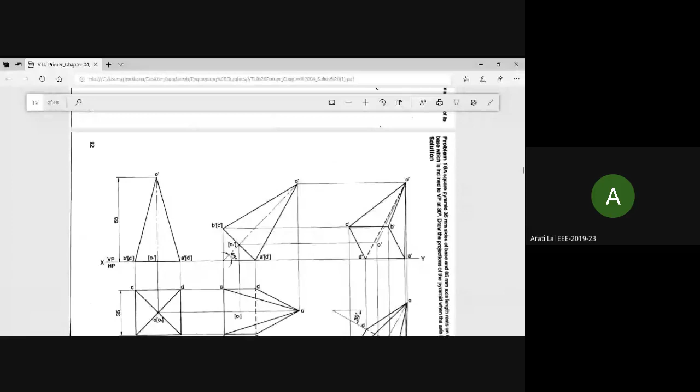Now I will be switching over to the pyramids. The only thing I expect from you people is, please do the problems on hexagonal prisms. Similar type. So I covered almost four different types: two in square prisms, two in pentagonal prisms. Take one of the problems on hexagon also, an angle problem or any of the solid prisms problems.

So now I will be moving on to the next type of solid, what we call a pyramid. Before I start, basically the pyramid is a solid which has a base, and its lateral faces are bounded in the form of triangular surfaces. These triangular surfaces meet at a common point, what we call an apex. I think we discussed this in the first class on projection of solids, where we gave an introduction to the different types of solids and their terminologies. So before I start, I wanted to refresh those things.

The axis in the case of a pyramid is the one which joins the apex to the midpoint of the base. So that is the axis. Once you say a pyramid, that solid should come to your mind. How you can imagine the solid: the base might be square based, pentagonal based, or hexagonal based. Only these three types are in the syllabus: pentagon, hexagon, and square. From each side we have triangular faces, and the triangular faces meet at a common point, what we call an apex.

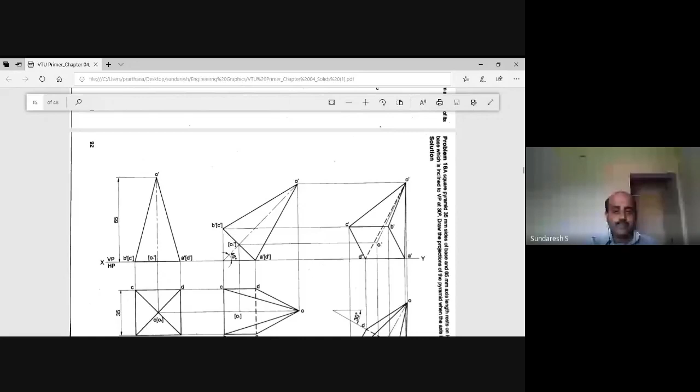So let us start with a simple problem on a pyramid. Then we will switch on to the problems in the other solids in a later class. Today I want to start with one problem on pyramids. Can you see this, everybody? Yeah.

So take down the problem. A simple problem to start with the pyramid; pyramids are relatively easier. Take down the problem statement. A square pyramid of 35 millimeter sides of base and 65 millimeter axis length.

Rests on HP on one of its edges of the base, which is inclined to VP at 30 degrees. Draw the projections of the pyramid when the axis is inclined to HP at 45 degrees.

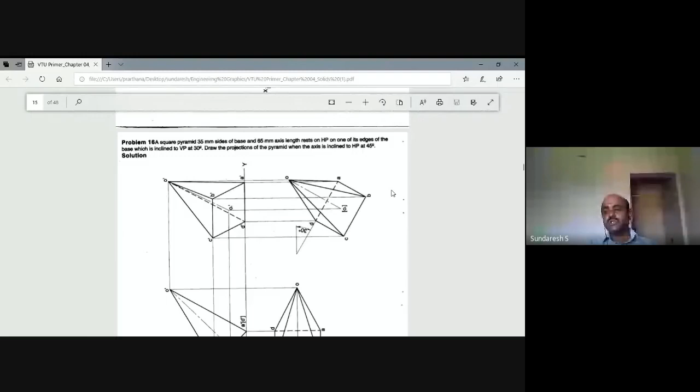and move to the third position where we have to show the base edge, which is resting on HP, is inclined to VP at 30 degrees. In that particular position, draw the top and front. So this is how you should think before you start projecting on a sheet of paper, how to approach this problem. Okay. So let us start now.

So when you keep a solid, that is a pyramid, on HP, either it is resting on a corner or resting on an edge. So generally we always start with the top view here. This is what you must follow in the case of a solid. Solids always start the projection with the top view. In the top view, you can see the true shape and true size of the base, whether it is a pentagon, a hexagon, or a square.

So therefore, always start with the top view in the case of solids, because in the problems we are going to discuss, and in your syllabus, the solid is resting on HP only. So in this case, when the pyramid is resting on HP and you observe from the top, you should be able to imagine what image you will see of that pyramid from the top view.

So simple. Okay, basically a pyramid is a solid which has one base and is bounded by triangular faces. In the case of prisms, we had rectangular faces, whereas pyramids are made with triangular faces. This is the change you have to bring out when you switch over from prisms to pyramids.

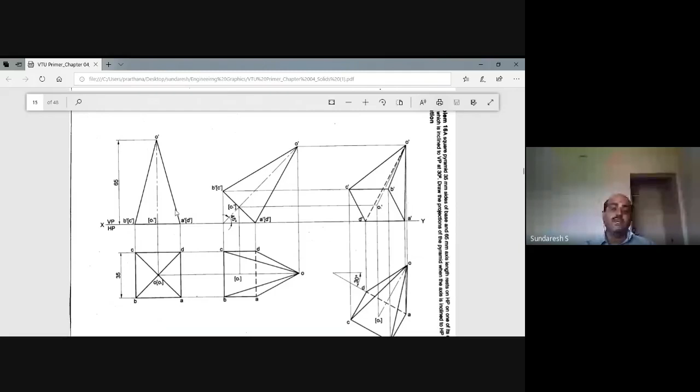See, when the pyramid is there, please remember this, the front view will be a triangular face only. So please, if by mistake you make it as a rectangular face, you are going to lose the entire 45 marks. That's what I am telling you. There are so many instances, very good students, they have about 40 out of 40 in the internal assessment marks, but they might have made the mistake of drawing a pyramid instead of a prism, or a prism instead of a pyramid. And they have lost 45 marks.

That should not happen. So please be careful when you are attempting a solid problem, read the question once, twice, thrice, until you get clarity with the problem, which is the solid they have given, how will be the initial position top view and front view, then go ahead, please. Okay. So this is the initial position of top view and front view of a square-based pyramid resting on HP with one of its edges of the base.

So now what it says in the second position, I hope you are following. If you have any clarification, please stop me. At any position, you can clarify your doubts. Let it be very silly doubts, not an issue, because you should not carry the doubts. They need to be clarified.

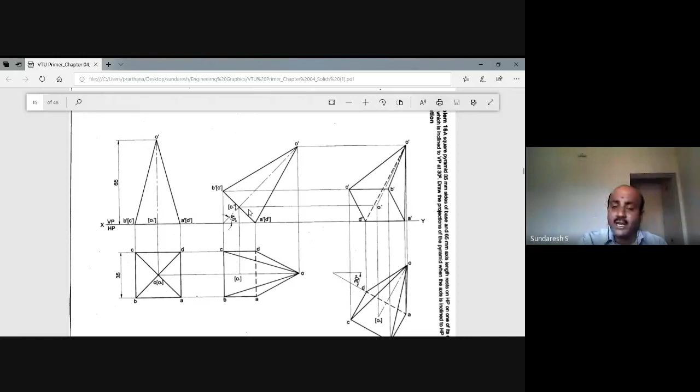So therefore, you have to start the second position front view by drawing a line at 50 degrees. When your line A dash D dash is inclined at 50 degrees, by default the axis is inclined to HP at 40 degrees. So when starting the second position front view, the angle of inclination should be equal to 90 minus the angle of inclination of the axis they have given. So first you have to draw this.

Therefore, in this case, 90 minus the angle of inclination of the axis with respect to HP, 45, is 45. So this is also inclined to HP at 45. So first you draw this A dash and B dash. Once you get this line A dash and B dash, it is easy to construct this triangular face.

So take a compass, measure A dash O dash. With A dash as center, draw an arc here, measure O dash B dash, this edge, with B dash as center, cut that and join those 2 points. Transferring a triangle is not difficult; using the compass you can get it done. This is how you transfer the initial position front view to the second position, satisfying the condition that the edge is resting on HP and the axis is inclined to HP at 45. So now the second position front view is drawn.

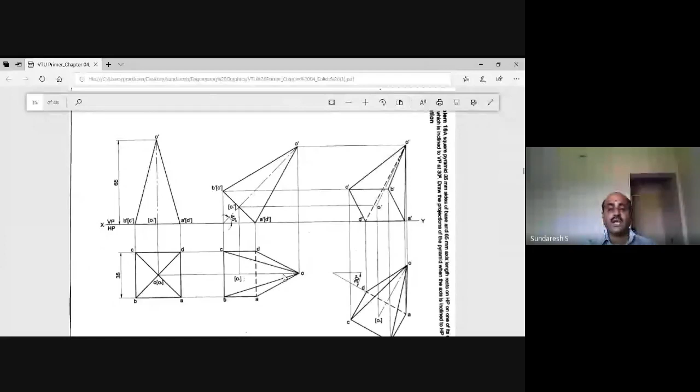So, now we have drawn the projection of a pyramid with the condition that the axis is inclined to HP at 45 degrees. Hope you people are following. Please do it. The pyramids are relatively the simplest of all the solids that we discuss.

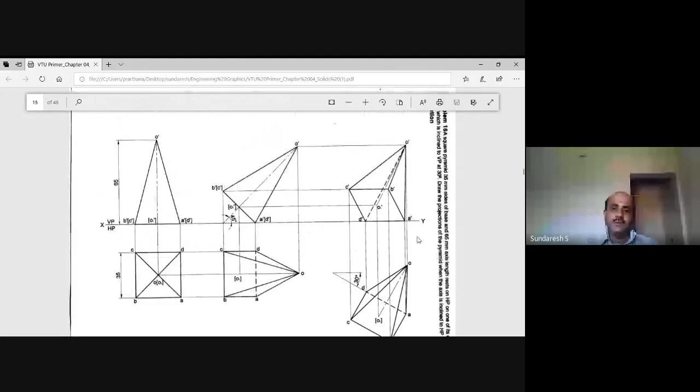So now, moving to the third position here. The condition we need to satisfy in the third position is that the base edge resting on HP is inclined to VP at 30 degrees. The base edge resting is AD. This base edge should be tilted such that it makes an angle of 30 degrees with respect to VP. In the sense, the entire solid is tilted such that the edge AD makes an angle of 30 degrees with respect to VP. Okay. So that can be shown in the third position.

So now the second position top view should be tilted such that AD makes an angle of 30 degrees with respect to VP. So take a convenient distance below the XY line. Draw a line parallel to the XY line, and from there measure 30 degrees and draw a very thin line. Okay. So on that 30 degree line, the base edge AD should appear.

So for that, you are tilting in this direction. First you can mark a point D on the 30 degree line, then measure the length of AD. Okay, by using a compass or a scale, of course. It is the same as 35 millimeter, not an issue, but always please practice taking the distances with the compass. It is always easy for you. So cultivate that practice. So take a compass, measure the length of AD.

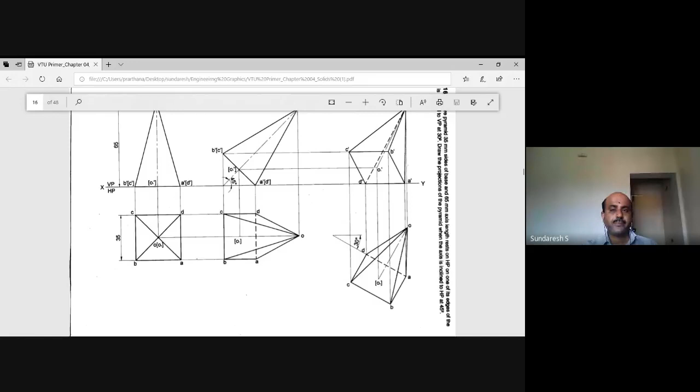Okay, O should be drawn. So how do you measure this? So take a convenient distance from this. Measure this. Okay. So what is this distance from O1 and O? Yeah. So now you can connect the points, join the points and measure O. Now we have to mark the point O with reference to the O1 and you have to join these.

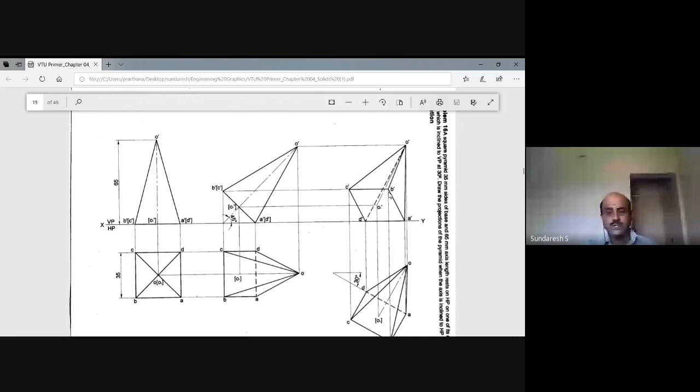So once you transfer this complete pyramid over here, then project it back to get the front view. So project the top view to get the front view over here. So draw the projector lines from each one. So again, similarly, you draw the horizontal projectors from the second position front view, and then you mark the points first. So once you mark the points, then you are going to get the front view. So the intersection points you can mark, and now you apply the rules of visibility.

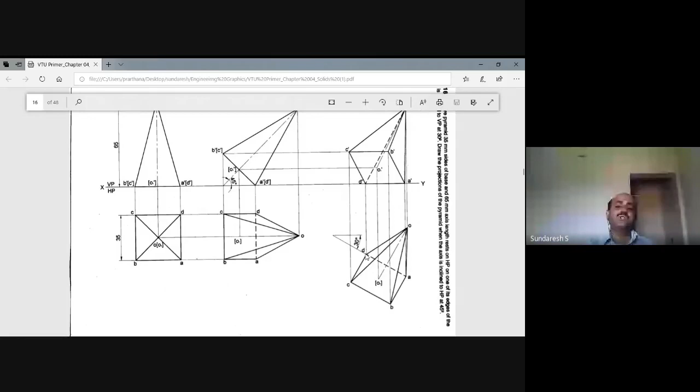When you are just observing this solid from the front, the observer is here, okay? So the base is completely visible for you. So the base of a pyramid is nearer to the observer, and hence base is completely visible. So once the base is visible, then the point which is away from you is the point D, the furthest point from the observer in this front view. So the edge which comes out of D should be considered as an invisible edge and should be shown as an invisible edge in the front view if it is not an outline of a solid.

Okay. Now, once you draw this point D, base is completely visible in the front. So you can make this base a continuous line over here, right? And then we can see this complete triangular face OBC. OBC is visible, and of course OAB is also visible in the front view. So the only triangular face which is not visible is the one which comes out of D. So this is D dash. O dash D dash is the edge which is invisible in the front view. So you can mark it as an invisible edge and join all this, they will form an outline, and then join O dash and O1 dash, which is the axis line.

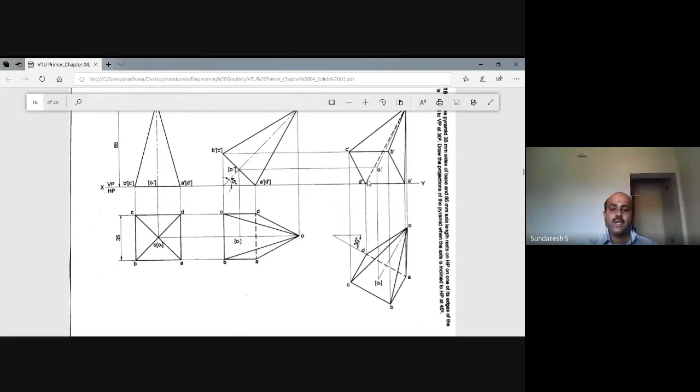Okay. So this is how you will complete the projection of pyramids. So if you have any doubts here, ultimately you are satisfying the base edge A dash and D dash on the HP. So AD is resting on HP. So this is how you are going to validate that A dash and D dash should be on the XY line. Okay, so this is how you should represent it. So please follow this.

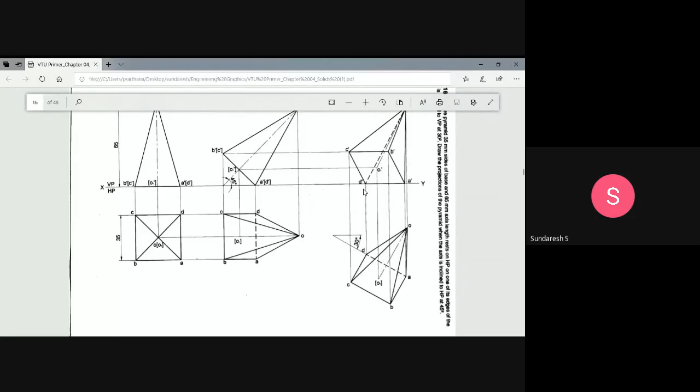My dear students, please keep on doing your sketchbooks or your sheets of paper, whatever you have available with you. Please complete all these drawings in your sketchbooks. Why? Because you will have a very short period before your exams start. Once you come to the college, maybe within 3 or 4 weeks, you will be having examinations. So a lot of things will be happening in those 2, 3, 4 weeks. So better always complete and get ready with your sketchbooks and everything.

Okay, so you have to attend the tests also. We have to conduct 2 tests in CAD, engineering graphics and EGDL. And a lot of things are happening. It's difficult for the people. So therefore, please keep everything ready. Once you come to the college, we may ask you to submit your sketchbooks. We have to give the marks for 40 marks. 40 marks we cannot easily give. So you have to complete this. Keep everything ready. Once the class starts, we will just discuss it in a very brief way.